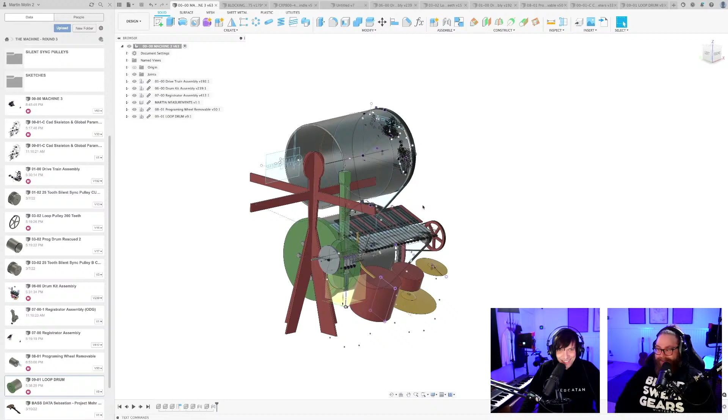Discussions in the previous stream, if we were going to use... We've been thinking about high-level stuff, so I'm going to try to take it up. If we can show the sketchpad, we've been in a rabbit hole today talking about using paper as programming memory for the Marble Machine 3. And there's been a very big discussion, or plastic, or Tyvek, someone said. This changes the identity of the machine completely.

And we've also been talking about, if we go back to CAD, how to insert the programming wheel. Let's see. How to make the programming wheel removable. Where are my... Once again, I have so many designs. And yeah, so it's been very high level stuff. Here is one removable solution. But where did the other go?

And I have just figured out a new solution for how to put these drums on and off using the hero of the thumbnail. Yes! Twist to lock pin that is saving our Friday night. And I want to CAD it, it's going to be pretty easy. I think to CAD it to show you how this will help us have only the circular tube.

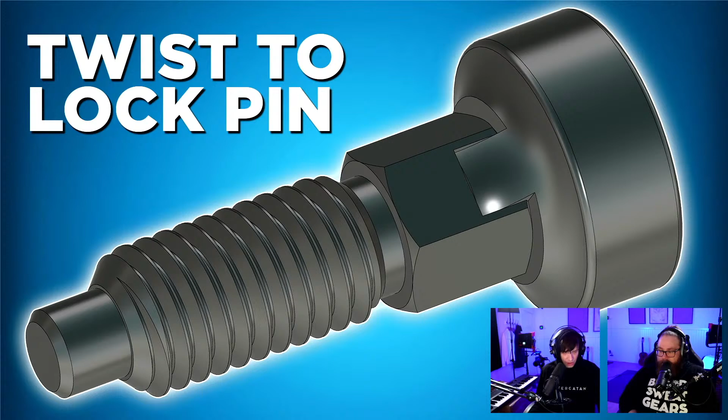Yes. We could machine very accurately these kinds of holes here. So if you think of it, which would make it very, very handy and very space efficient, to use this aggregate head to drill the holes in the sides for this twist to lock pin. And I actually have the twist to lock pin right here. And the cool thing is that you pull this thing out, you twist the head 90 degrees, and the pin stays in its retracted position.

Ooh. So one person could click, click, click, 8 pins on one side, click, click, click, 8 pins on the other side, and the programming wheel is ready. Put the drum in, and I figured out a cool way to make that easy. So I'm gonna CAD that now, and I think the drums are still saved. We're not gonna go to paper. And we also have this hammer jammer bass solution here from the previous stream.

And Hannes 3000, while we were just having some food, Hannes said you can also improvise on that hammer jammer. Like, yeah. When you start thinking about it with the original marble machine, for me at least, the first 2 minutes of that video is mind-blowing at first. Like, oh, this guy built this and it makes this beautiful music, and then all of a sudden the breakdown comes, and then you start with the bass. That's the magic. You get your mind blown twice in that video. First with the machine, and then your interaction with the bass.

So that's a crucial part of the marble machine in my head, you being able to play bass, and with this hammer jammer you can freestyle completely. You don't even need the marbles to be dropped on the hammer jammer doing the solos. You can just freestyle, slapping that bass however you want. Yeah. Woo-hoo! Made me really happy. Just mute the bass channels, no marbles get dropped, and you...

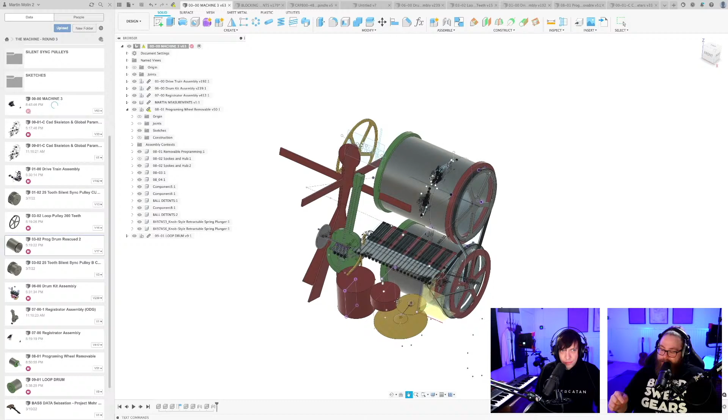Here we go. Immediately in chat, B-Boot Champ: Hannes is 1000% right. That's what we like to hear. Woohoo!

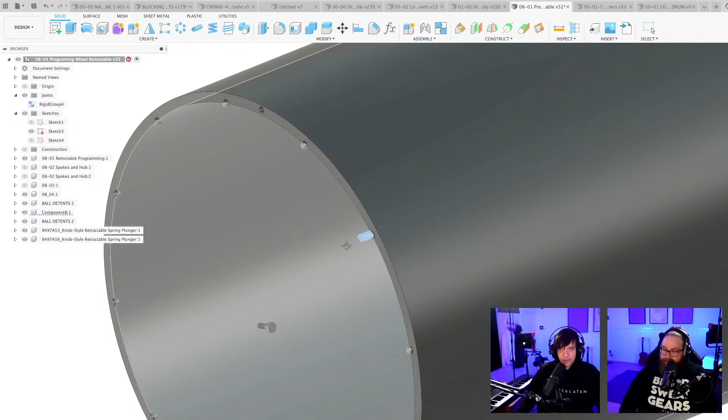And PK Margo, Hannes did not read me. I'm sorry, I can't always read everything, but let's see what you wrote. PK Margo: Martin, many music boxes can store up to 6 different tunes in a single cylinder. Have you considered this instead of, or in addition to a removable drum, you could change program while playing? So the way that is working is that the pins are programmed in a spiral. Then you can have a 5 revolution long song in a spiral, or you can just shift the drum over and you get a new song.

I have thought about it, but I just think it's too difficult or not practical because basically the registrators would be so thin and the pins would be so thin. So the idea now is just like on the Marble Machine X to have a spare set of rolls that someone can program off the machine while playing song 1, and then we switch them back. I think that's gonna be awesome.

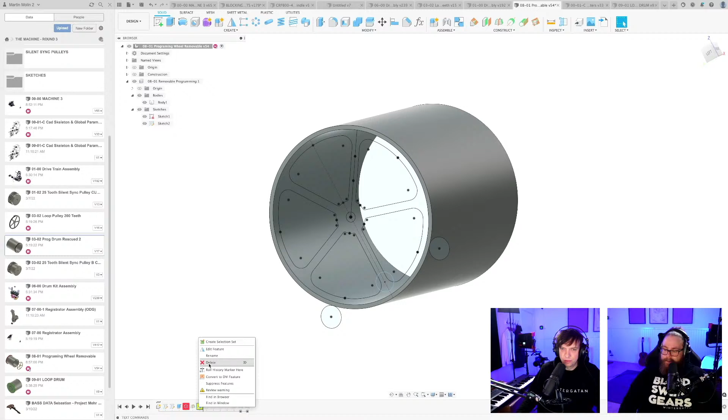So let me see what this is. Check what this sketch is. Nothing. So let's see. We have Joey D, who said a couple of days ago, and he will say it again, look for a ball lock clevis pin. It will solve a lot of problems. I can Google that for us, see what that is. Interesting.

Let's see what we have here. This is a ball lock Clevis pin. They are beautiful. What makes these so great that will solve a lot of problems for us? Could you specify that, Joey?

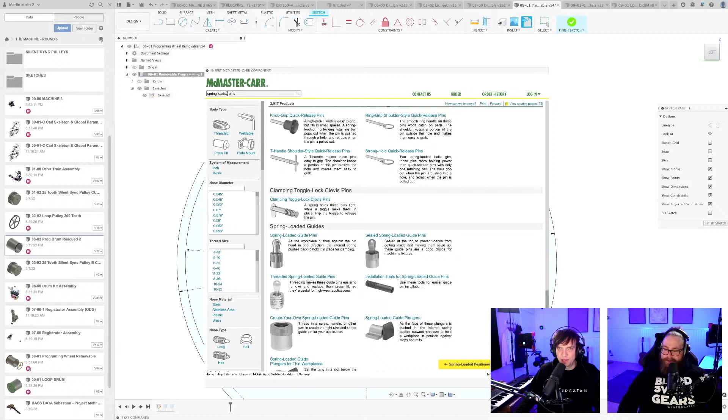Another thing that someone sent that we have actually in the programming pins -- talking about programming pins, you should pull that up. There's a suggestion, Hannes, in Programming Wheel to use, instead of the O-ring idea, just use these slotted spring pins. So was that an old suggestion? No, it's in the new one.

So let's say if we have them in metric. Yeah, 4mm is the smallest one. How long is this? 4mm length, what? No, 1mm diameter. Oh, and here's -- oh wow, we have them in every size. Here's 3mm diameter. Let's try 20.

So I think what you're suggesting with the ball pin is the same thing, that we can just find a pin that has a press fit designed into it from the beginning. So here's the pin -- just want to hide this body. So it's like a pin with a little groove, so when you put it into a hole you can push it in with some force, and then you can take it out, and it has press fit built into itself. This, I think, makes a lot of sense, and I think this is actually a better idea than the ball detent. Did you have the suggestion for the spring pin?

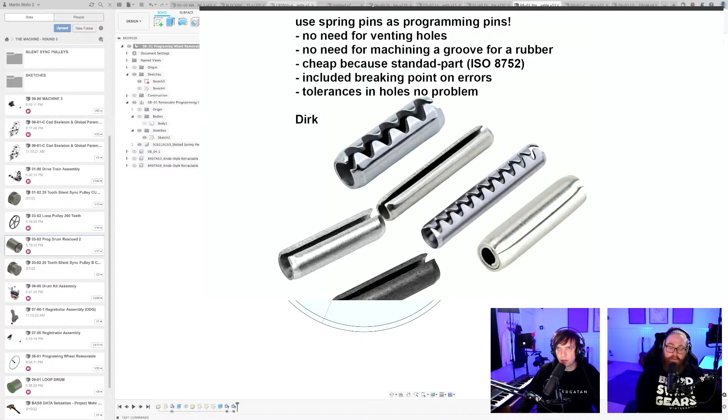I have a couple, can we just scroll them through? Yeah, in that folder? Yeah, let's take a quick look. Take the next one, I just want to show -- take the next one, I'm gonna look at this later. Yeah, next one, here. So Dirk says use spring pins as programming pins: no need for venting holes, no need for machining a groove for rubber, cheap because standard part, includes breaking point on errors -- maybe, maybe not -- tolerances in holes, no problems. I can't think of a simpler idea than to use a rotary CNC machine and just drill holes and insert spring pins. I think this is a winning combination, Hannes 3000.

Woohoo! Yeah, so I don't actually want to derail this stream with too much programming pins discussion, but I think the spring pins is a very, very good path forward, because I want to show you how I think we can replace these drums in a very safe and repeatable way.

Let's delete this, just deleting everything that I had in this design. Oh, that's the hole, let's delete that. Let's delete this. Let's delete this. I think I could have started from scratch, but hey.

Some people have some experience with spring pins, saying they can be really hard to get out, and even in. Yeah, needs a punch and hammer to remove. Okay, so that doesn't sound good. We need something lighter than that.

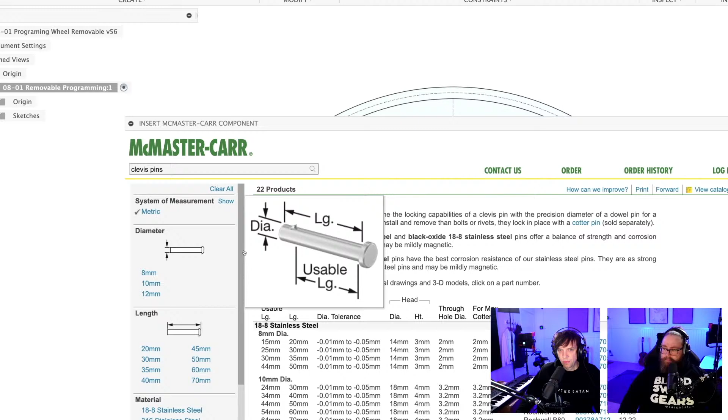I wanted this first as well, but we can't use 8mm pins. That's why I still think the O-ring is a good option. But anyway, the direction to use something like this is good.

One of these - if the spring pin is not flexible, then I agree. Either it will not grip, or it will be too tight.

So here I'm going to cut these resting pins that I talked about. Let's do 45, so it's lying safe.

And for this one, I'm going to do a parameter on the fly, which I learned yesterday from a super nice comment on the stream. I checked it up after the stream. Anywhere in Fusion, you can just create a parameter on the fly, they call it. So I say...

Pin size equals, sorry, I lost the zoom. I say 6. So there's 6, and it doesn't look like a function, but it is. Because if I go over here to the other hole and I say I want to constrain you, I just write P, and there's the pin size. Oh wow, and it becomes 6. Nice, so now I have a parameter on the fly. It's a little cool trick, actually. On the fly, everybody. Woo!

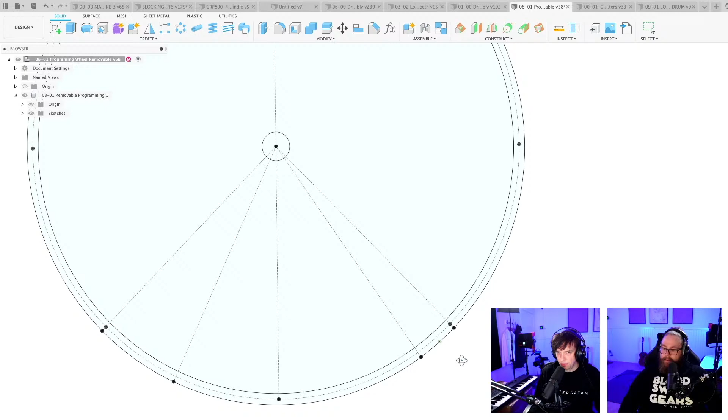Jerome Blomshire says just use Lego spring pins and go full circle.

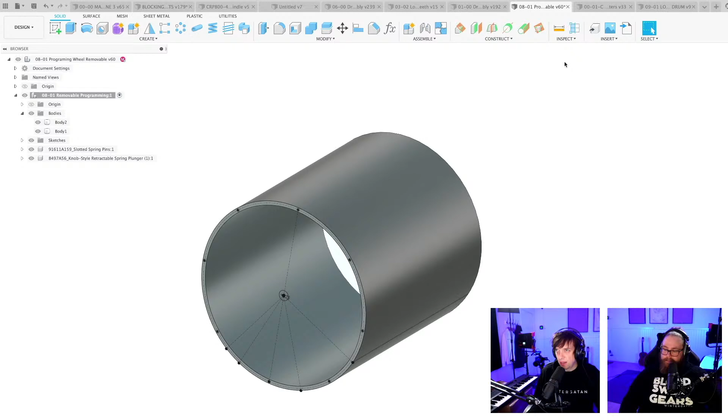You are a Gretzky, skating where the puck is going, because I think the X travel is difficult. So the question is about how this CNC machine will be able to reach - is it called Z height? Yeah, Z. Is that the same thing? Yeah, so Z probably, which is Z.

Alex CNC have made these precision plate designs, which means we can lower the whole gantry. The whole axis can be lowered so that this thing is touching the floor, and on the CAD it's in the highest position. So the Z height is going to be enough when we lower it to the lowest position.

I could kind of illustrate it by making a sketch here. This really wants to be on this side. So if I make a 110 circle here, which is larger than the thing we're gonna cut, it can be down here. And as you can see, it's kind of hard to get to that.

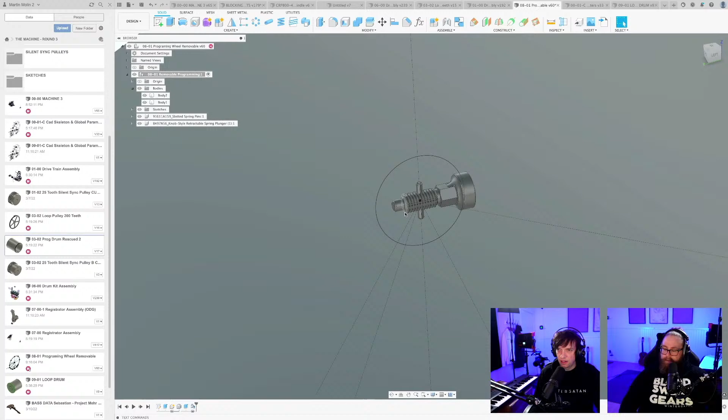Let's go back to the programming wheel. So here we can see how far this pin is protruding from the surface. I'm going to drill a hole just a little bit over that. From here to here is...

Measured strange. From this plane to this plane, 5 millimeters. But depending on drill and stuff, I think we should go a little bit deeper, so let's go 8.

And I'm just gonna take them all. I should perhaps not do that. I should perhaps just do a circular pattern on the feature.

KK Altair just entered the live stream, and Martin is looking at saws. That can't bode well.

I'm taking this cut feature and rotating it around this axis 8 times. Boom. And then I'm going to do the same on the other side, which I'm going to do over a mirror plane - mid plane, I mean.

Just want to say this here real quick from B Bootchamp: McMaster Carr has a half groove dowel pin, pre-grooved for O-rings. It comes in 3.175 millimeter and 2.38 millimeter diameter. Can you give me the name again? Half groove dowel pin.

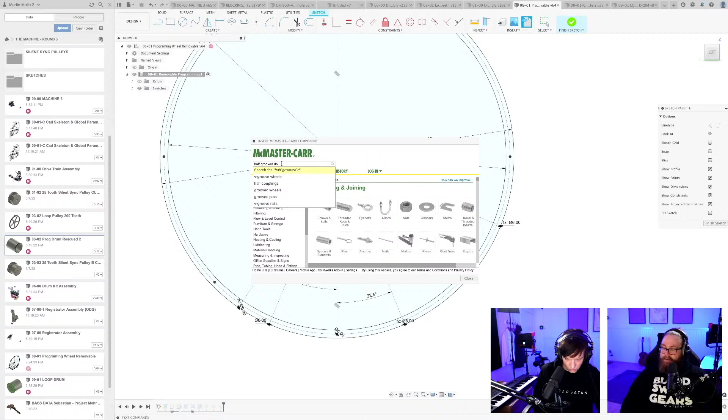Okay, follow up here from B Bootchamp. No, not those ones. It was on the screen. Half grooved dowel pin with notch. Half grooved dowel pin. Okay, let's just go for dowel pin. Half grooved with notch. Half grooved. Oh! Here we go. Gretzky in the chat. Oh, wow. It's even for a spring like that. That's cool.

Inches. Only in inches for me, but I can probably... What is 332? Let me download this one. Where did you go? Sometimes it's here somewhere. Oh, it's there. It's very, very short. Just had B Bootchamp screaming out yes in chat. What is this? What's this strange shape on the side of it? Typical when you find the thing you want and they make something you don't want. Ooh, this is 2.383 millimeters.

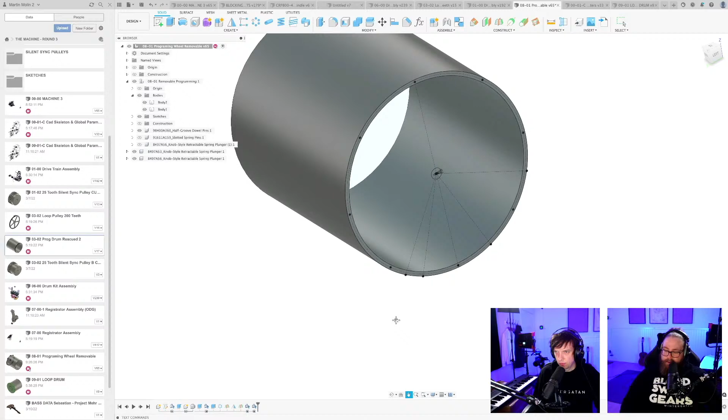And Joey D has concerns about O-rings. He thinks O-rings will make the timing off because of tolerances. The idea is that the pin is straight from the precision fit of the hole. I hate when Fusion makes these lines. Anyway, so the idea is that it should not do that.

So here is my kicker idea. So in the surface, we can machine this. I'm going to make 6 millimeter, maybe 10, cutouts like this. And that means that when all the slots are opened, we can just lay the programming wheel to rest on these pins that sit in the gear. And by cutting another configuration on the other side, we can fix that.

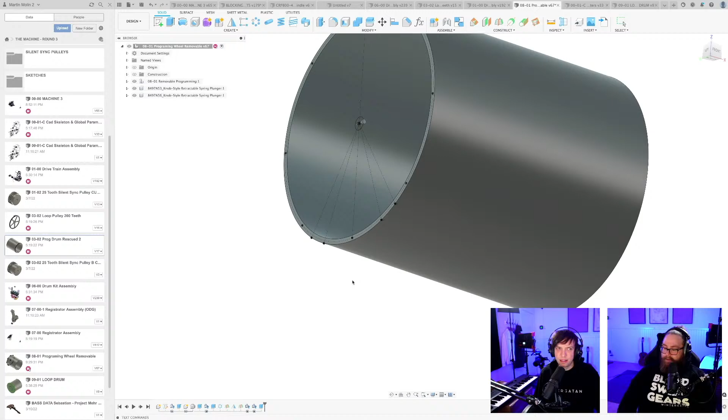Lucas Wendel: I wouldn't worry too much about the pins. Any CNC shop with a bar-fed lathe can groove and part off ground stock; shouldn't be too expensive per pin. That was what Alex CNC said also. A CNC lathe will spit out these things, he said.

Now there's something wrong here with this cut feature. I have no clue. So I'm trying to cut. You see, it doesn't look right here. Oh. Someone messed up. Probably Fusion, right? I would say that's absolutely the most likely. Oh, I should cut the whole circle, of course, because Fusion doesn't like when planes are exactly next to each other. So I'm cutting the whole circle, and this should be the end of all our troubles.

And Martin, if you would be so kind, could you just explain a little bit what you're actually doing right now? So we are talking about how to make the big programmable drum removable from the machine. In the previous stream, we even talked about using paper programming, which would not need these drums at all. We were discussing wildly the whole day about that. Right now, the drums are still in. And then we made this solution for removing them.

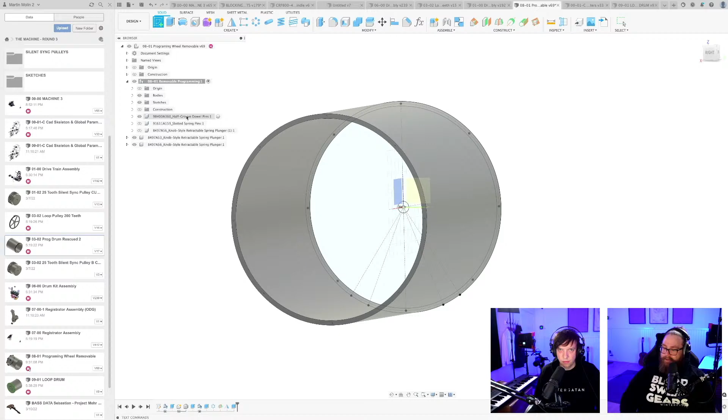So let's now make the other side. I'm going to sketch the other side. And I'm projecting this sketch on the body, which is not really professional. I'm doing it anyway. And my idea here, the thing that I wanted to talk about, is that I want another configuration on this side. So let's project these lines as well.

God, I'm slow when I'm talking. Come on. I wanna learn to be fast in these streams. I think that these streams are helping the project immensely, but I want everyone to feel like, whoa, things are happening. I want to be fast. Yeah, but if you're too fast, no one can follow along what you're doing. We're trying to find a middle road there. Some people actually learn stuff from you when you're working like this, Martin. Don't forget that. That is true. Thank you, Hannes.

So I'm cutting almost the same holes, but here is the new hole. I'm cutting on this side, so there's one hole off. And what did we say? 8. Which means that this drum can only rest on these pins in one direction. And 10 we did. And what I'm doing here is just so when all the lock pins are open, the drum will be able to rest by itself.

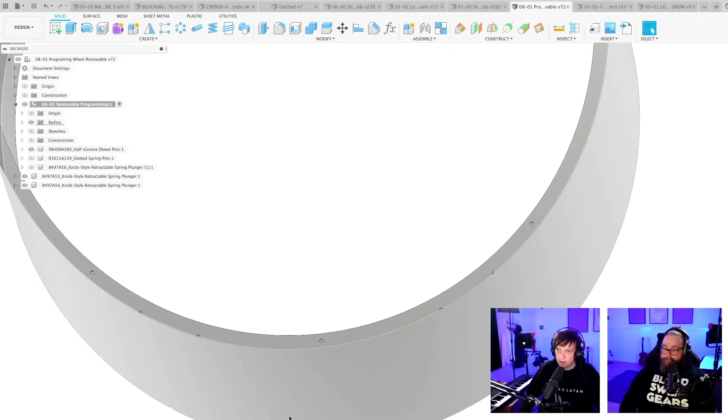So these indexing pins should take care of that. But you are right. We could make it even more secure, if we see that a pin is not going in. No, basically no pins will go in if they put the drum in the wrong position, because one pin here will prevent everything from going in. So this is exactly my idea. Okay. So brilliant viewers. Yes, Gretzky's in the chat. Skating where the puck is going.

So let's now take this, our friend. I almost called this video the best pin in the world. Some engineering clickbait, high level engineering clickbait. But instead I went with the totally non-clickbait: This pin just saved our Friday. Look at that pin. Isn't that a little exciting?

There we go. And I'm going to just copy this. So we have 8 of those there. I'm going to mirror all those over to the other side just for fun. We're having fun here. It's your own world. You can put a pin wherever you want to. A happy little pin. Right?

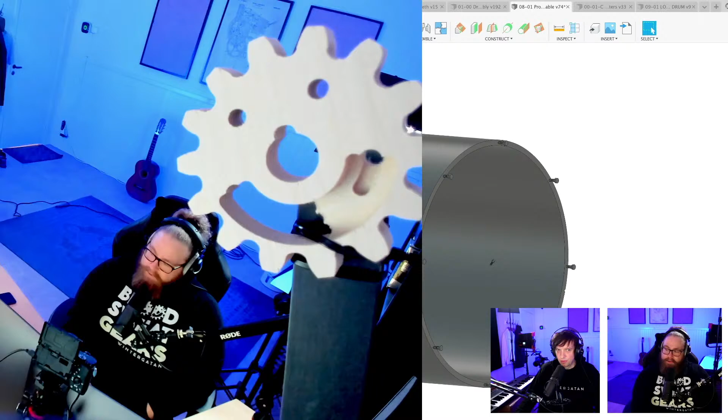Do you know who's against it though? That guy up there in the corner that's watching ominously over our shoulders. Yeah, keeping us in line, of course. Never happy, is he?

So there's the pins, and the magic of these pins is of course that you can retract them with your hand, turn them 90 degrees and lock them in their open position. So let me now CAD these resting pins that I'm talking about. Yeah, then I can show this. That's good. So new component, resting pins. And these will not be retractable. They will just sit in the gears and the hubs.

So there will be a resting pin here, one here.

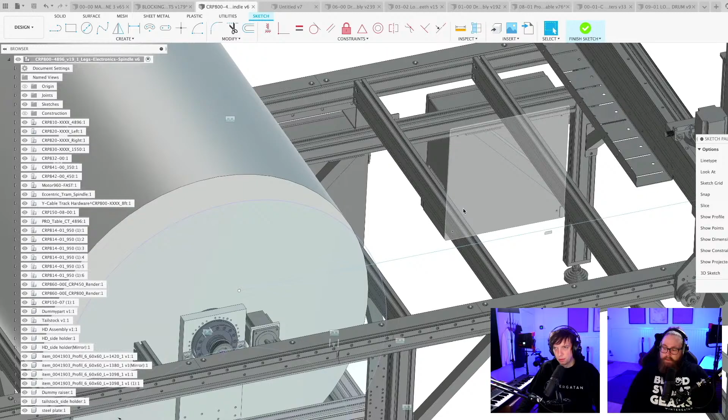Boom. Let's now make the resting pins on the other side.

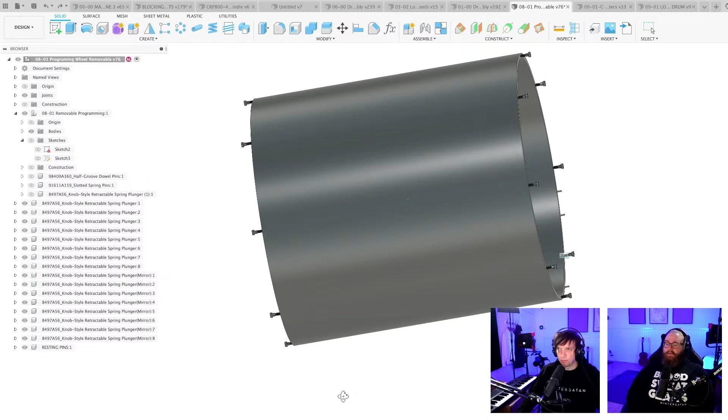And what is kind of amazing is that we can put the first programming track already after like 1 centimeter here. So these stick in, what did I say, 5 millimeter. So I should actually have maybe even less protruding here, so we can start the first programming track even earlier. But maybe that's a little greedy.

So these pins sit in the hubs, so let's make the hub. And this is where my feeling... I don't know how we can make the hubs really straight, because there's nothing actually locking. We need a strong hub. Not just a bearing on a little shaft. We need something better than that, perhaps. How could we do that? So, right hub. The left hub is going to be the gear.

B-Boot Champ is on fire today. Have we completely ruled out the possibility that Martin can tape all the instruments to Hannes 3000 and he just throws marbles at him to play the music? Hannes has a body now. Use it! That was never really an option. So, boom. Shakalaka.

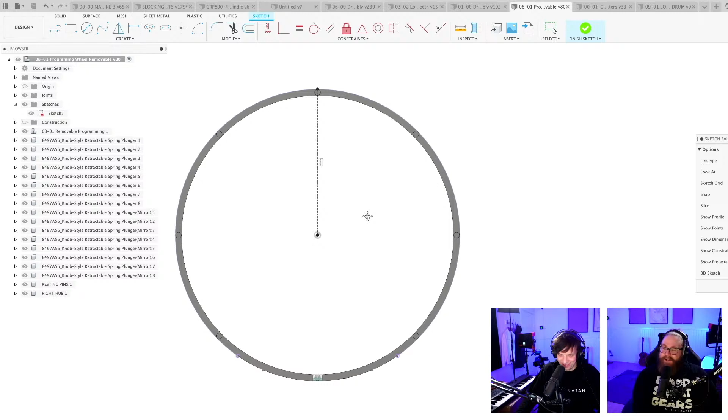I'm a big believer in our future because of globalization. In the end, we're gonna understand that we live on this pale blue dot in space. I think we can become friends, all of us. Right, Wilson? If you ask this guy, he would just say, "Not a chance in the world." But I believe it, Martin. Good. I've seen it in chat. People have an idea that they're really fighting hard for, and then they get some evidence from you or another one in the chat, and they're like, "Okay, I hear you. I understand."

That's like a famous science story. There was a super famous professor, astrophysics or something like that, who'd been working with this theory his whole life, and there came this new young scientist who had done some experiments and came to the university and made a lecture, and the evidence invalidated most of the professor's life's work. After the lecture, everyone turned to see how this famous professor would react. And he slowly walked up to the stage, shook his hand and said, "Thank you for proving me wrong." And everyone erupted in a big applause. That's goosebumps right there. It's the scientific method. I love it. I believe in it.

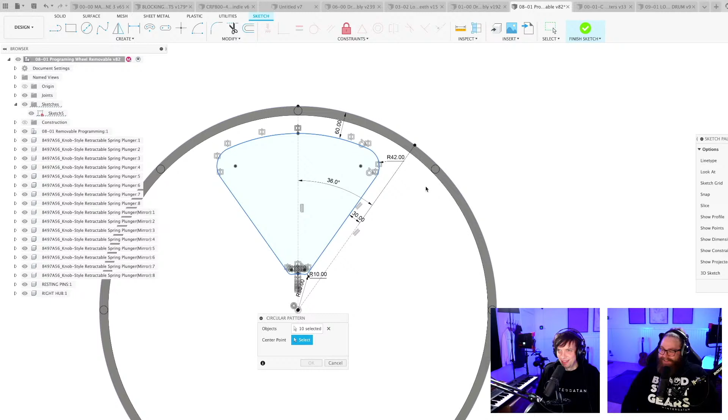We have a weight calculator in the public link pasting document. You can actually calculate the weight later. So circular pattern on this, and we will have our spokes. AKA Marco69: "Spokes are so easy to CAD these days." That tells me you have seen me do this a lot of times now.

So let's do this for a hub. I am a little bit worried about something. What will actually keep this hub really solid? Is my whole pin thing a lie? Have I been lying to you this whole stream? I want to project the pinholes from this sketch. Is it here, the sketch? Yeah, I'm finding a weakness in my own thesis, and I'm not as happy as that lovely professor we just talked about. There's one thing when someone else comes and proves you wrong, but when you prove yourself wrong, less fun, right?

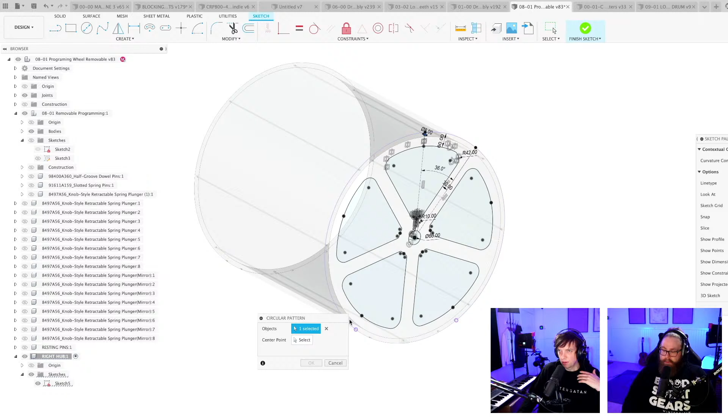Yeah, so there's nothing really keeping this hub tight. Look, like pushing the hub to the side. It's just a pin, so oh my god, my wonderful solution. Maybe it's not so good, Hannes. What am I hearing? This is not what I want to hear. No, me neither. Me neither. What? Okay, here we go. Now I recognize myself.

You know what, Martin? I'm gonna head out and prepare some thinking juice. Yes. Friday thinking juice. Yeah. Be right back. To make this design work.

So this is why I love this design. I think this was so cool if you think of these pins, that you can open all the pins and just take this out. But we need to make this sideways stable somehow. We can of course press it towards each other. So if it's a little bit hard to get this in, that you really have to press it, they will press outwards. That will be enough, I think. But it would really require it to be a little bit of a press. But I'm not against that.

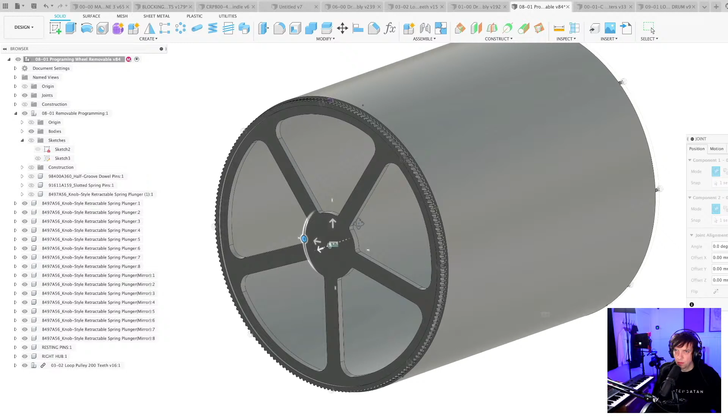Let me just think, because what I'm worried about now is that we do not have a shaft through this whole thing, because we want to be able to take this out. So I'm worried about the sideways stability of this yellow thing. That's what I'm thinking about.

Oh, thank you. Friday stream. Cozy.

Let me bring this hub over here as well. Boom. It's this sideways efficiency that made me love this idea so much. But what I realize now is, how can we really... If we just push it to the side really thoroughly, so the drum is press fitted into place, it has nowhere to go, and it will work.

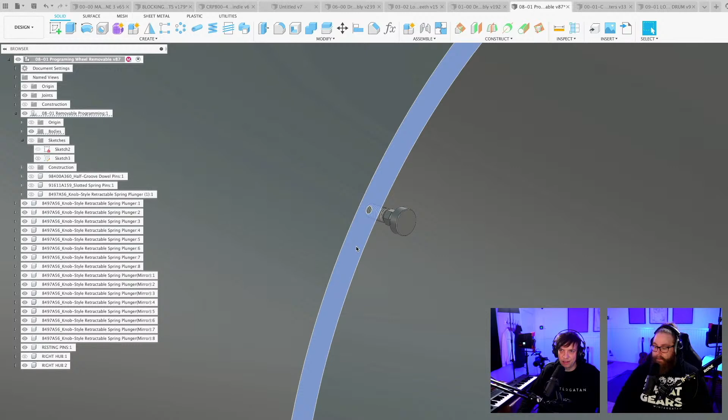I think as long as... Let me make the shaft. I think maybe... Oh, we can use the flanged bearings. A large flanged bearing here. And then if it's just a press fit... Am I being stupid here? I don't think so.

I'm fighting for sideways efficiency. Maybe a little bit too much.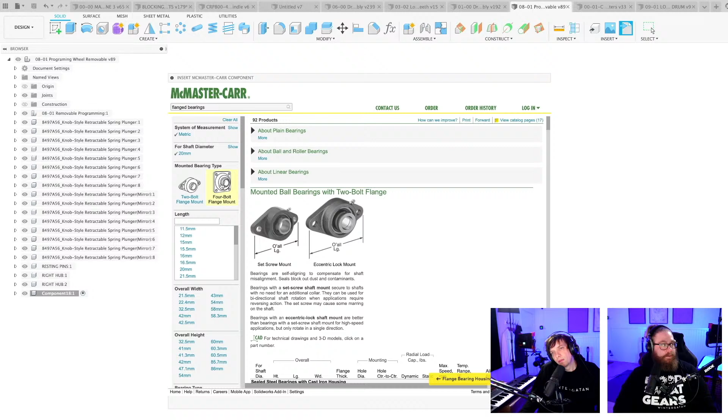Flange thickness. Oh, these are... What? $175? No. I'm going to search for bearings instead. Ball bearings. Ah, here, flange. These are the ones I'm looking for. Metric. 20 millimeter. These are beautiful. Housing, let's go 32. Oh, only 7 millimeter. They are so smart, these. Let's see how thick the wide one is. 9 millimeter sounds a little bit better. Download.

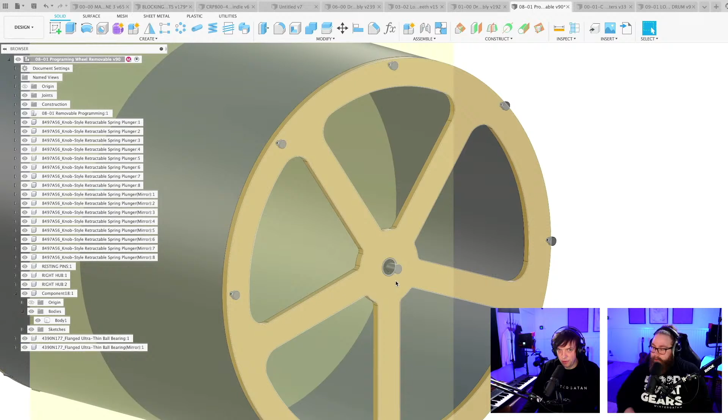Let's mirror this bearing over to the other side, over our midplane. There we go. Look, we have our first bearing on our shaft. But the idea here is that nothing can actually stick out. So this shaft cannot stick out like this, because then we can't get the drum out. So it has to be in there. Can we fit a small little something? And then we take the drum off. This whole thing can fall apart. We can fit a little stop ring here. Yeah. I think this could work. But it needs some tweaking.

Chat is saying that there are a couple good suggestions in the Dropbox right now. Should we take a look at some? I would love to. I'm in the programming wheel. Yeah, before we go there, let me just import this. That's important. Let me import it into the main model, just to feel that things are happening.

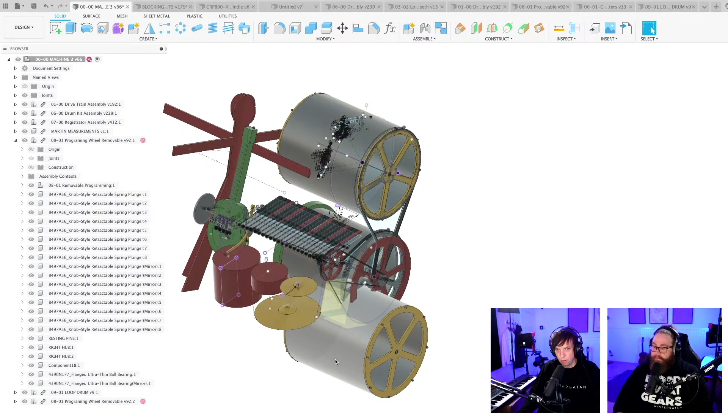So later this spoke is going to be the same as this. And I did the same mistake. We have to do a rigid group. You can see that everything did not follow. Nothing basically worked. So what you have to do then is make a rigid group. Woo! Let's make a rigid group of this whole thing. And then when we update, it should pop into place. Something went wrong. Wait, do we have... Oh, it was already imported. I'm stupid. Because I redid the previous. Okay, good, good, good.

I like the simplicity of this. So let's check the suggestions. Let's see what we have in this folder at the moment.

Oh, first off, seems to be with the paper in mind. Paper or plastic spike wheel, paper lies on top of prog wheel. If no hole in paper, spike wheel cannot engage with prog wheel. If paper has a hole, spike enters prog wheel hole and prog wheel drives spike wheel, which drives instrument. High torque with paper, prog wheel can be any size.

So this is a way to make the paper stronger, so the paper hole goes over. This is a very interesting idea actually, well done, from Isaac Robbins. Nice, Isaac, I think the idea is to make the paper reliable, so you get the strength from the programming wheel. Although you have the problem that you have to manufacture both here. But this I've never seen, it's a very cool idea. It's a really small image.

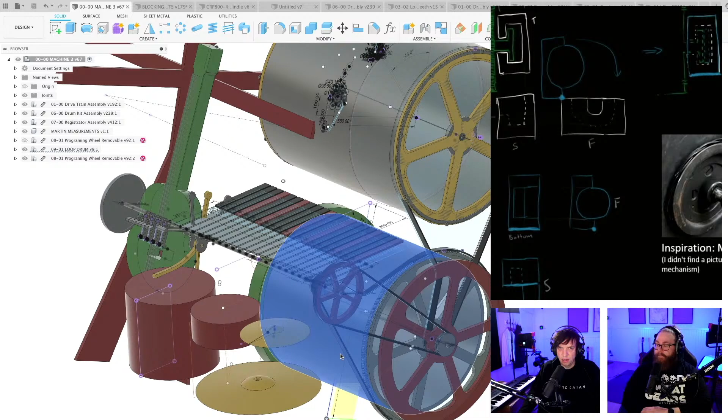Because the lower drum, this drum, is 800 millimeter and can fit in the bigger drum during transportation. So we have 4 of this in total, so we had 2 pairs.

Let's check the next one. Paper roll with loops - well, I can't read. Stabilizing table, yes. Oh, you dropped the marbles through the holes. Cool.

That is going to be tricky in different tempos, though. Oh, this is so fascinating to see things I never thought of. So thanks, Lucas, that was awesome.

Programming drum, axle supported in bearing block that can be split or released, axles some other way. Belt pulley space needed more between frame to be able to fit the belt pulley.

Oh, so that's the sideways sketch, from Lucas Vandel. Aha, nice, copying from music boxes. Space needed more between frame to be able to remove drum. Axle supported in bearing block that can be split or release the axle some other way.

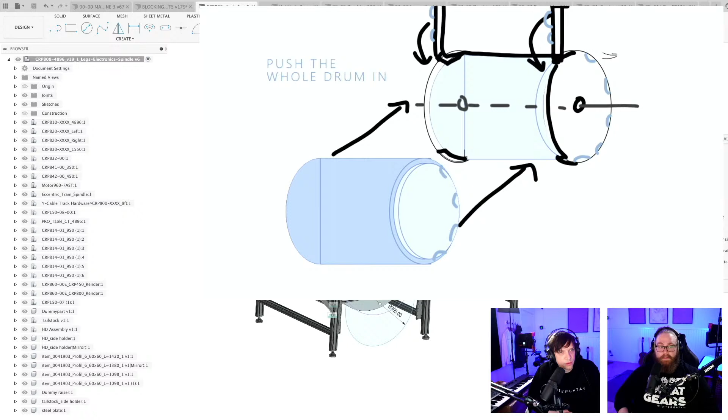Push the whole drum in. Yes, that's what I want to do. Oh wow, that was small text everywhere. Oh, there's more papers here. Yeah, dropping through papers - equals, oh, it's the same idea from 2 people. I love when that happens. This is also Lucas, I think Lucas, who sent the earlier one.

Oh, so this should be in the link. Oh, can we see the whole image? Yes. If this is working, no programming wheel change is needed, just discs from the side. Programming wheel.

Disc pushed from the side. It looks cool, but I don't quite follow it. Drum can be unlocked. Opens, closes here. Open.

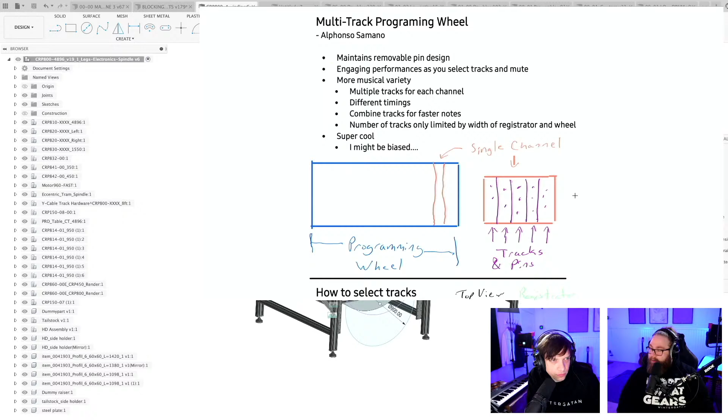Go down. So, how pin springs, track selection. Let's see further down. Yeah, so this is the music box idea.

If we could just shift the registrators over, let's entertain this suggestion. Let's go to the sketchpad.

Let's say we have the registrators here, and let's say we have a black pen, and let's say we had the space for it. And let's say these were all connected on some kind of rail. Wow, it created a straight line for me.

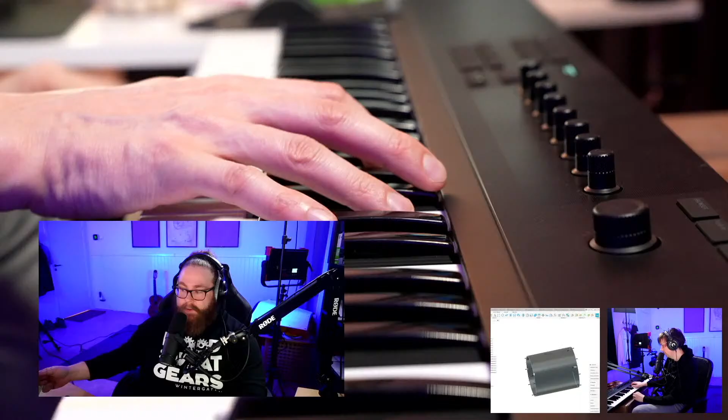And you know, because we don't have the magnets anymore, let's check how much space theoretically we could have on our programming drum. Let's say we make it, because it's only the readers we need to switch over actually. This might work. I've been so annoyed because I wanted to make long music, and the paper - we talked about this a lot earlier today - the paper would allow us to make things like fermatas. A little pause here.

And then we could just, with the paper, change the key and stuff like that. And me and Hannes have had fiery discussions today. No, we're going to go with the programming loop. And if we look back at the sketchpad again, we're not going to use paper. This idea to shift all the registrators over one time, or three times, two times, might work. Let's... probably not, but probably not.

Let's go to full screen CAD and see if we can figure this out. What do you think, Hannes? Yeah, it can be a really cool feature. You're skeptical? Let me see what you have in mind. I haven't seen this before.

No, this is how they do it on... oh, we have a video with Luke. Go to Luke, the video we made with Lucas on YouTube on the main channel, because he's shifting the drum over to choose the song. I think we made that into the video - the barrel organ that sounds awful. I think Lucas agrees with that. It doesn't sound awful, it sounds awesome. I think that has a nail drum, and I think Lucas is shifting it over sideways in the video. Lucas can confirm.

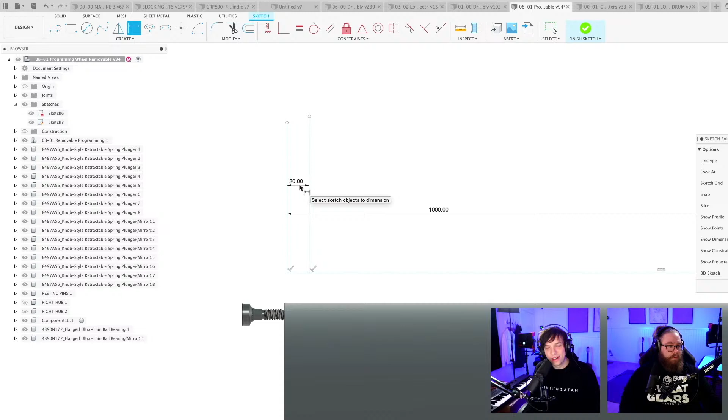Wait, this might work. This might work. This might be a beautiful new era. Imagine having not 64 bars, but 128.

Because there's still 10 millimeters. This depends on how much space we need sideways for each track. So with a 3 millimeter pin, oh, it's gonna be busy.

So I'm gonna drill the first programming hole here, 3 millimeters. Oh, look at this. There's a lot of space because our pins are so small. This is not an issue. We can do this. And even if we want 16th and things that are really close, we can just put them here.

So I'm now looking at the programming hole pattern, all possible holes. So if we then go to our registrator that we worked on the other day, here, our beautiful Registrator that I love so much. The only thing we would need to do, first of all, the linkage would need to be able to accept a 1 centimeter sideways shift. Imagine the big lever that just moves all these 50 registrators over a centimeter, shunk. And we have like a new, ooh, if there's a programming pin in the middle when that happens.

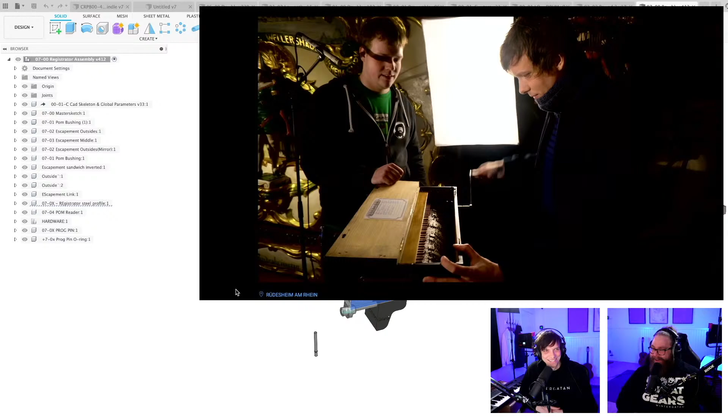Show the banjo, Hannes. We have to see the banjo. We filmed an instrument. Is it directly in the... No, it's not. Here's the banjo, right? Let's see. Banjo orchestra. This is brilliant. Plucked mechanically. Yes. Look there. Ooh, I love it.

Martin, you ruin it. Oh, short-haired Hannes. Nice. And this is an accordion I think I would be able to play perfectly. Hook fast. Good joke, Martin. Good joke. Brilliant 10 guy, out of 10. Brilliant guy. Stand-up comedian. 10 out of 10.

Okay, so Lucas pointed out there, sideways shift when the programming pins are in means trouble.

Divide by 51, not 50. Someone said they remind Martin. Oh yeah, you're absolutely right about that. Because we want some space on the outside. Gretzky's in the chat, skating where the puck is going.

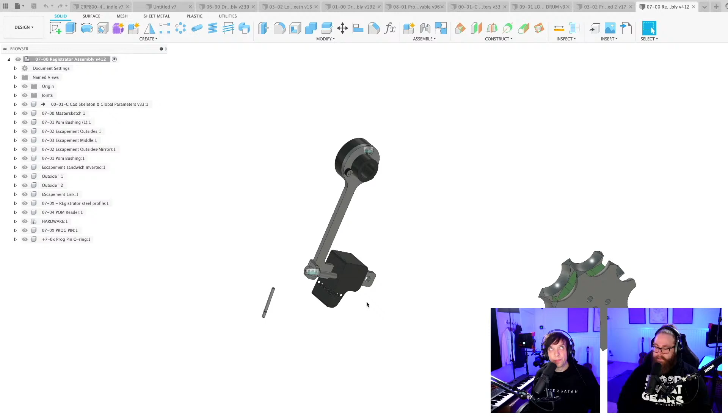And also someone said video evidence, move the barrel, not the registrators. Just because it's on video, it's not automatically evidence that it's true. I have seen videos of things that were not good. So I'm just logically trying to get the statement together. I understand what you mean.

I think it's much easier to slide these on a shaft than to slide the whole drum. Of course, the mechanical links after these, they only need to be slid 1 centimeter. Slide the whole drum. But how do we deal with the sideways things? Maybe if there's enough flex somehow, maybe we can get around it.

So my point down here is that this poor little 3mm programming pin, it doesn't need this monster of a registrator to hit it. This is 25mm wide. So if we go to the sketch of this one, where is that one?

This is too cool. When I saw it, what's the name of the person who made the sketch? Alfonso Samano. Yeah, when I searched first Alfonso, I was like, oh, that's cool. I wish it was like remotely even possible. And right here, right now, I think it's absolutely doable.

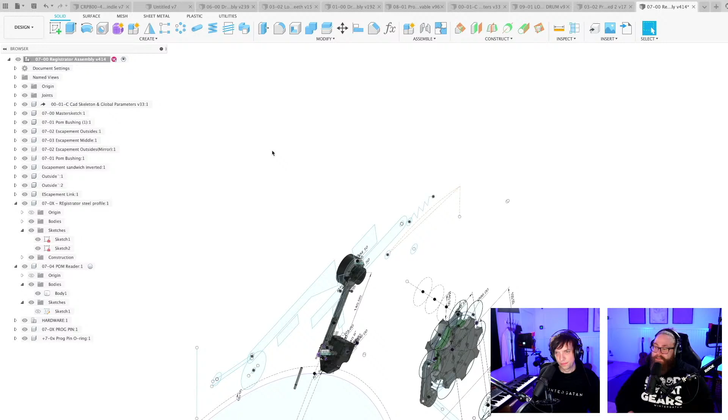This is interesting AF, Hannes 3000. Yeah. And we have a lot of suggestions to go through still. Because when we started looking at suggestions, new ones popped up on Dropbox fast. Hold the thought.

I'm thinking about the edge case that you want to slide either the wheel, or I think this works. You don't understand what kind of possibilities are opening up. We don't have to have the same melody over and over again. That repeats over and over again. That's why we love it as well. But we could like go to that thing and then back to if we wanted to. Verse and chorus, just like Alfonso showed it.

So the edge case, how do we solve the edge case? When we slide something sideways and there's a programming pin right to the side of it, something needs to flex. And that's something... Cookie crumbs. Have the verse and chorus pins always triggering. Have a muting group for each. Now you just doubled everything on the whole machine because you doubled the amount of registrators, you doubled the amount of...

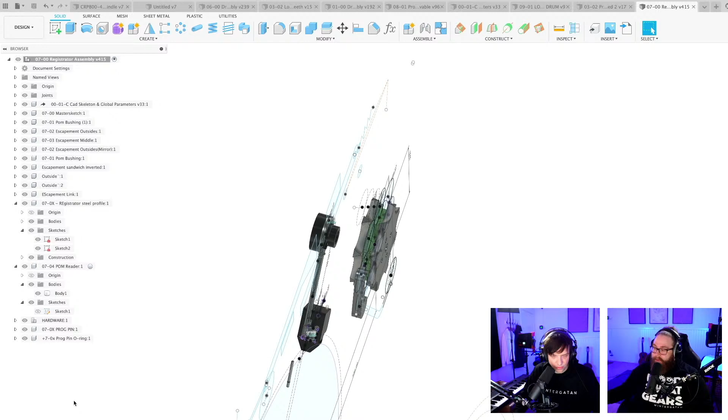It's an extremely interesting suggestion. I'm gonna write it down and let's look at Alfonso's and give him credit. Sheet here. 2 tracks, prog wheel, chorus / verse. Wow, I love it. Alfonso Samano. How to fix edge case. I don't even think that's exactly what you mean, but maybe you meant a little bit like that. Some of it is definitely it. How to fix edge case when sliding over prog pins.

Yeah. We don't want half hits and stuff. Yeah, this is not... Of course, you can end the first song with a big break. So all the music will have breaks into the new... So if you have like... pause, switch. Pause, switch. Maybe like that. Yahoo! Now I've made 3 parts though.

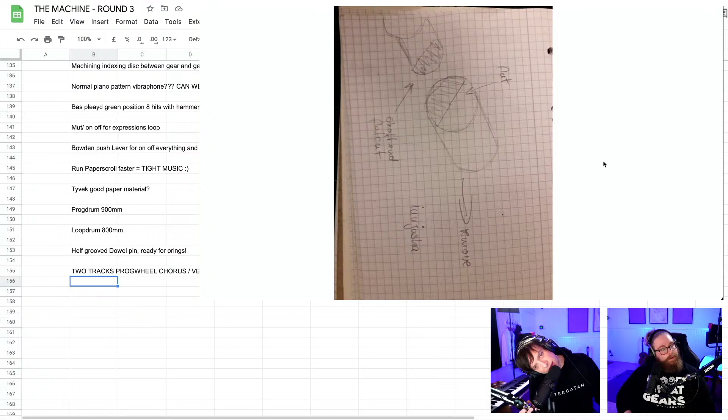Let's check next suggestion. What does it say? Shortened? Cheers. Need some thinking oil. Thinking juice. Not shortened, flat cut. It's on the side. Yeah. Can you not rotate it? Well, can I? Let's see. There is a button for that there. Perhaps I can. Flat. Shaft and flat cut. Remove. Is it a programming wheel? Yeah, so I'm missing the context. I'm a little slow.

Paper curves, paper wraps around, registering pins, relief channels, stiff ends tuck in. So this person is a little bit into the same thing that we saw before, that the programming wheel is supporting a paper. No, it's just to drive the paper in the correct... Yes, I'm with you on this. Stiff end tucks in. Okay, now I'm with you. It's how to drive it in a good tempo. So if we look back on our previous thing, I think what we're seeing in the sketch is these holes that we also had here. So I'm with you on that idea. At the moment, the paper is out of the discussion. Let's check the next one.

Vertical toggle clamp. Ooh, that is kind of sweet. Protrudes kind of a lot, so it will make the frame wide. Okay, cool. Cool idea. Pinholes. This is what we've been working on this stream. Permanently attached to the drum. Okay, so we make some kind of little rim permanently attached to the drum. Drive wheel stays in machine. Yeah, I really like this. This is very feasible.

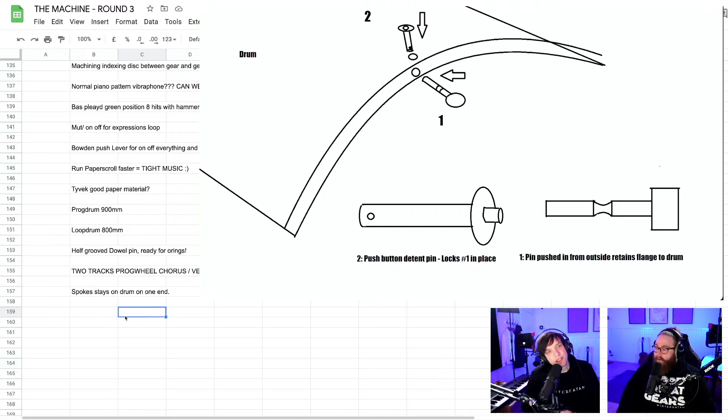Yeah, so this would work, but it steals programming surface. Because you see you have metal and a hole on the top, and we're only using like 6mm of the side. And if we go back to the Hirth locking, actually, hang on a minute, this idea, that would use nothing. That would not even use 6mm like my pins.

Hirth toothing. I always love when I learn a new word. Toothing. Sideways. Efficient. But how to add axial force? When I designed the captain's ship crank, that was to make the axial force. Is it gone? This one. The idea there was some kind of spring.

I kind of love the idea that we can just use the CNC machine and cut like some kind of pattern on this in the side everywhere. So it just slots into place to the other thing. It's very elegant. No holes, no pins, nothing. That's elegant. This is a simple problem actually. We have too many good solutions. Okay, next one.

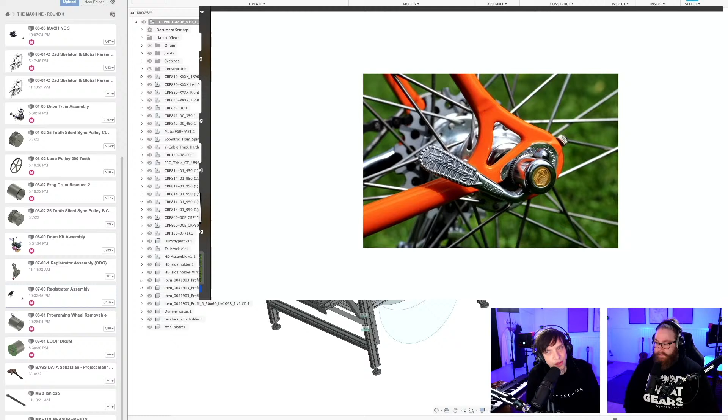Okay. Yeah, that's the... Like a bike? Yeah. I like this actually. Maybe we should just get a bigger touring, sell more tickets to the shows, bigger touring truck. We can have the spokes on, we can leave the hubs on the programming wheel. Yeah, this is super, super popular idea. Same idea here. You can have instruments in the drum because you have no spokes and stuff. We have something more.

Fastener, swappable programming wheel. Frame rigid. Okay, so the programming wheel has a hub in it permanently, if I understand correctly. The orange thing. Oh, okay. Or am I seeing it wrong? Yeah, so there's a lot of bike and of course they have to replace their tires. So it's a good inspiration. Okay, cool. And we have something more behind there as well.

For changing the programming wheel, just unlock the 4 pins, take it out and insert a new one. Spring tension, programming wheel. Yeah, I think this is similar to the idea I CAD'd. But the pins are sitting a little bit further down on the spokes. Okay, so let's see. We have a couple more. Yeah, I just want to say, can I show CAD?

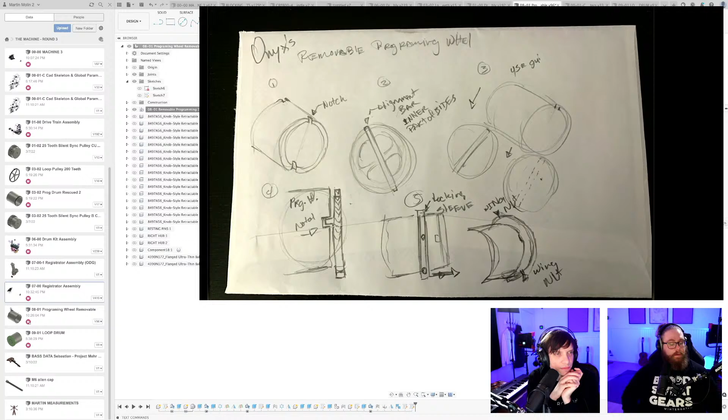Notch. Yeah, this is also good. Just slide it in the notch. How do you lock it then? Wing nut. Okay. It's so much fun seeing all your sketches. Now this is a very similar idea. So this is good for one side. This looks brilliant for one side.

Apart from the fact that we don't trust the inner dimension that well, but we can make features so that we can trust it. But how do we do on the other side? This one we saw. Collar fix. One side permanently affixed to side.

Oh yeah, so you slide it on, yeah. So are there bearings in that thing? I don't understand. If it rolls on that thing. Someone said this was inspiration from a car engine the other day, something that looked like this. Easy lift out. Ah, smart. It's a trolley made for the wheel, right? Made lock wheel. Gravity holds it. What does it say? Holds it down. Oh, sorry. Holds it down. Okay, cool. I thought the idea was making the trolley that just comes in and takes the wheel perfectly.

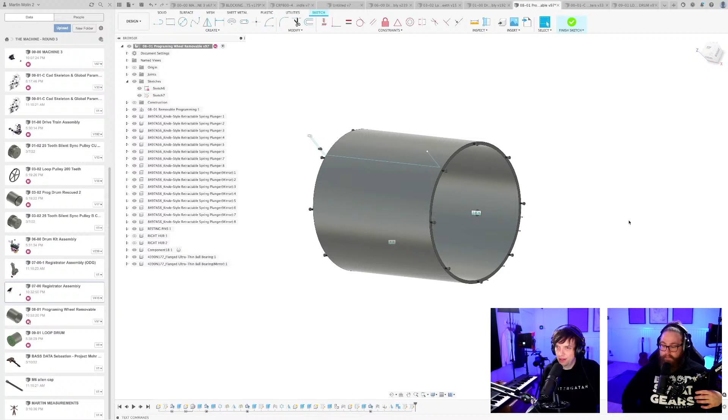I need some thinking juice. That's what I need. Yeah. Can you get me some juice? Yeah. It's getting warm in here.

I'm in love with this idea of switching the registrators or the programming wheel. I don't like to slide... Oh, careful. Yeah. I don't like to slide the whole wheel because it's just so huge. Where's the registrators? Do I have it over here? Yes, here it is. So the cool thing with this, we can always dream, can't we? This. Let's also take this. Let's make a rectangular pattern. I think this would be kind of fantastic.

So we're talking about making the programming wheel able to hold twice as much information and able to play twice as long patterns, which I think would be revolutionary. I have to make it a little thinner, but not a lot. Woohoo! Hey, what happened to the bolt? Let's lubricate our minds. So it would look like this, and you just shift it over 1 centimeter, and you have a new part of the song. Is it feature creep? Is it wonderful? Oh yes, it's both. All at once.

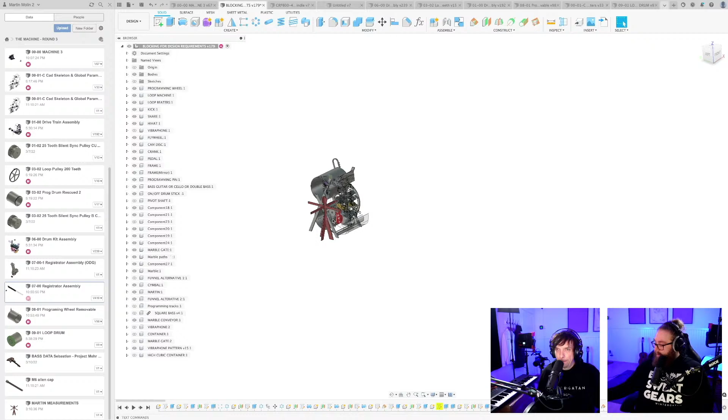You could do this so easily. Like I could do it from my standing position. Let me see, where is my block? I have too many designs. This I could do with my left arm with a cam lever right here. So let me show you what I mean. Let me try to make a sketch plane. Make a new component. So we can have a cam lever here that pushes. So if I put the pivot point here, object visibility. Let me see those juicy sketches. A round circle looks like this, but we're not gonna make it round. We're gonna make it a cam lever. I think it's called a cam lever. Let's call it that for now.

Yes. Friday evening. Thank you. Thank you, Hannes Paradis.

Well, maybe not like that. So it's an ugly one, but you will get the gist of it. So I should add a little lever to it also to make it a lever, right? Oh, yeah. You could very accurately shift this whole component. You can add this whole component on a rail that is built for this to shift. So now if I push this lever around this pivot point like this, you can see how this part goes in. And it will push it over. And with the correct geometry, you can make it.

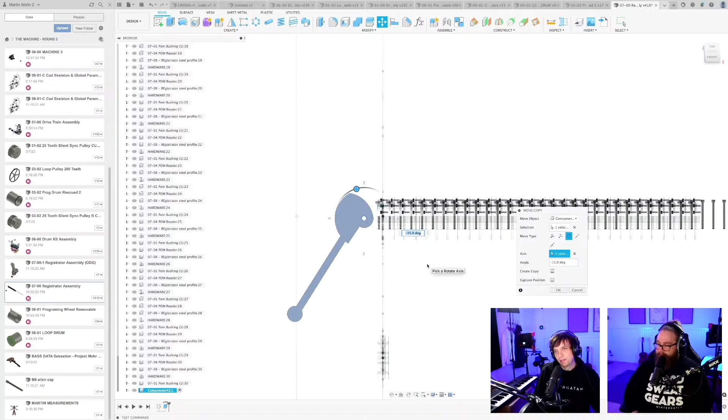So here, this side is the verse, and this is the chorus. And like Per said yesterday, don't bore us, take us to the chorus. Ooh. So this would be like, and here will be. Wow. Cool, huh? Yeah. I think you're onto something here. This would be amazing. I'm thinking about the problem with touching the pin from the sides, like Lucas said.

If you just go slow, yeah, it is a little tricky. Or maybe it lifts up at the same time. Uh-huh. We lift the whole thing in the same motion. Can we look at the video with Lucas again? He just lifted them. He first lifted the thing, then he shifted them.

So if I make a sideways sketch on this one, we lift it at the same. Can we do that? Yeah, we can. I think we can. Don't you think we can? Of course we can.

So show any new viewers inside the organ here, if you come closer, Hannes, is that there is actually 7 songs programmed on this same barrel. And Lucas showed, you can show how we're... So first you need to have this up, because if you would move the barrel side to side, it would break some pins. But after that you can lift this, and this like knife gets a catch in a groove. Okay. And after that, if you're in the groove, you know you have the right melody, and you can read what melody you have and just count the grooves in the shaft.

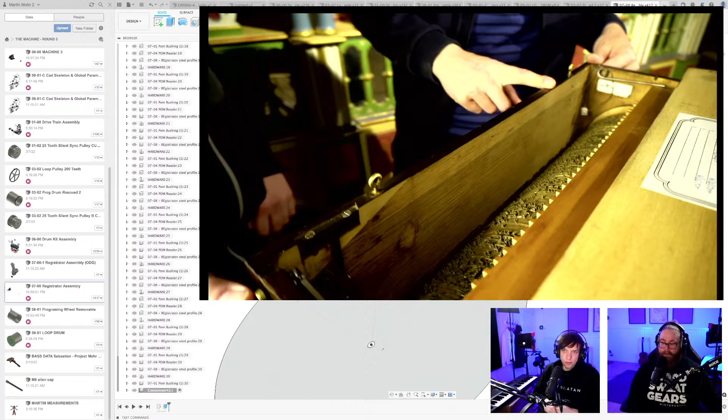We have to lift all the registrators. And I can't wrap my head around that. The work of placing these bridges and these nails. There's still one person left who does this kind of work. Wait, if we lift them, we will have another edge case where they land on top of the programming pins when we're dropping them back down again. Not so smart.

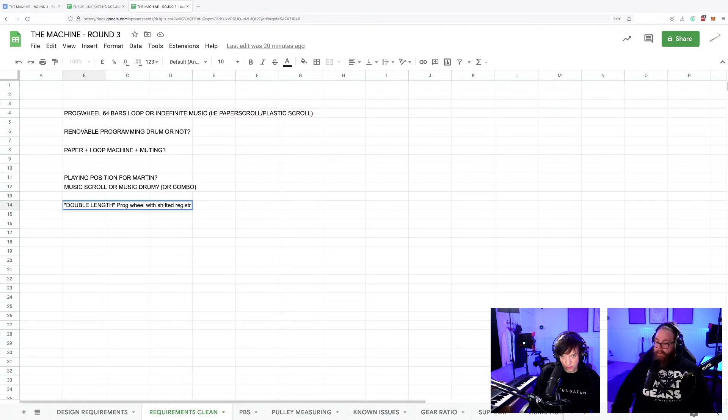Anyway, for now, if we can make it double length with the programming wheel, this makes the decision even more fun. Removable programming drum or not? Yes, it's going to be removable. Boom. Yes. Paper loop machine plus muting. Playing position for Martin. The loop machine stays. Oh, we answered all these questions. I thought they were unanswered. Answer: prog wheel. Removable.

There's one reader, something Ethan Dagg said, don't make them lift, make them rotate backward while shifting. Ooh, and then if you mute... Oh, that's smart. Hold that thought. Playing position for Martin, left side. Music scroll or music drum, that's already answered up here. Double length, yes. How many double lengths do you want? Yes. Yes, please. Okay, so here comes a suggestion from Ethan Dagg. Don't just rotate. Yeah, so basically this lever needs to do a chain.

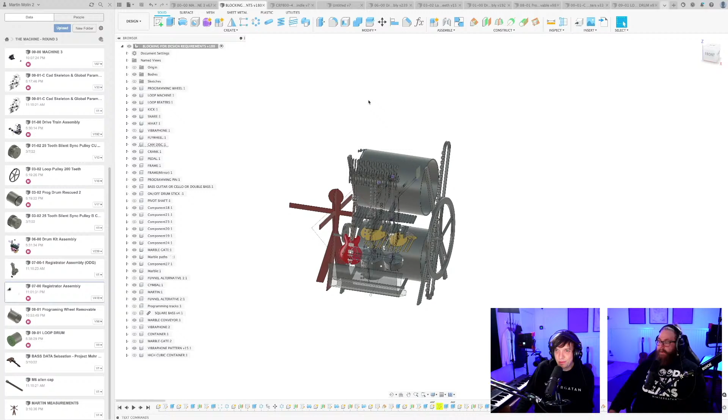Yeah. Yeah, these days when working mostly with the high-level design decisions, it's so abstract, and I'm so impressed with everyone being here with us right now that you are following this madness, because it is easier, I think, when I'm CADing one part and I'm finishing that part. Right now, we're just very much in the beginning trying to get a feel of what we want the machine to do. So it's kind of abstract and kind of all over the place, so that's why.

Experimental. Yes, also. We're in an open mindset. Yes. Now is the time for dreaming as well. Trying to find the sweet spot of dream and reality. You know? So brilliant, this guy, right? Andrew Cooper, one lever to rule them all. That's exactly what it is. Cheers. Thinking juice.

So yeah, honestly, I don't know if I can do any more abstract concepts. Let me look at this machine from the front. The sideways shifting has me all in a tizzy. It's making me giddy. Yoo-hoo!

Friday night. My dream Friday night. Do you know what that is? CADing among friends from all over the world with Hannes 3000 and being sent a curveball of a design idea that can change the future of humanity. That's my favorite Friday. Friday night hubris.

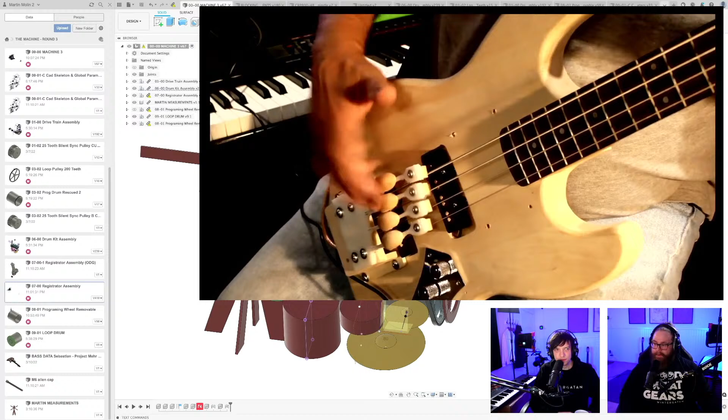Barely touching these hammer jammers. What did they say? 11? Something like that. So shout out to Big Walnut Music YouTube channel. Pretty awesome. Pretty freaking cool, right? Yeah.

So shift back, mute all. If we mute all, it really doesn't matter what the registrators do. Hang on. I said that there was an issue if it comes down on top. But as long as it's muted, is it really an issue? So if it comes down on top of a pin, it will take some time for it to fall down. Yeah, it's a good idea to swing everything back and then go forward.

Yeah, the command string, I'm trying to sound like a coder. I always wish I could code. I've never coded a single line of code in my life. Pull lever, mute all tracks, swing all registrators backwards, shift all registrators 10 centimeters sideways, rotate the registrators forward again, unmute all tracks. Then the other way of the lever, you want the same thing to happen in reverse. Thank you.

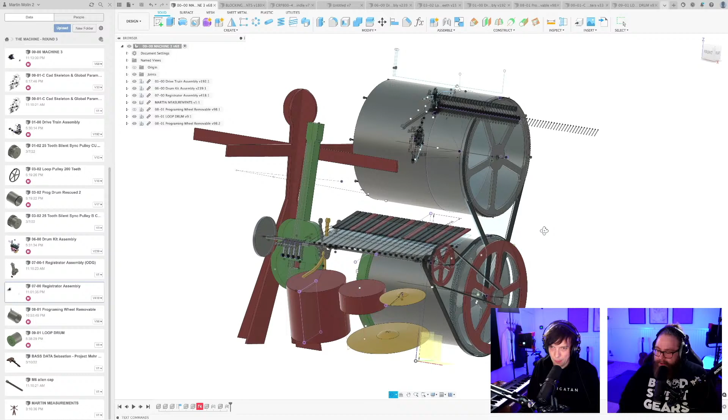Welcome everybody to the Hannes Hour. Yes. I will take questions now. Just bring them. I will take over this stream now. Enough with the CADing. Let's do some actual work. Talking. Yeah. I think we're done with the CADing. Make the design requirements less specific. And we also have a lot of suggestions on Dropbox to go through if we need to do that. Yeah, so let's do that. So we're pivoting. Now it's design review. Design review. Let's go.

Hoodie Kid 100: Hannes, my girlfriend wants to know if you're single. Whoa. Sadly, no. I'm not. That's not sadly. I am not single. Oh, burn. Oh, no. There's a lot of questions to me here. Oh, no.

So let's see. Let's go through. We already have like 8 new programming wheel suggestions. Oh, cool. So let's start with those, right? Yeah, definitely. I will prepare for that. Definitely, let's go with that.

Oh, wow. So now this is like Twitch streaming, right? This is not YouTube streaming anymore. This is like Twitch streaming when you really just hang out, I guess. I know that Twitch has their own culture, in a way cooler than YouTube culture sometimes. But we're here. That makes the decision easy, right?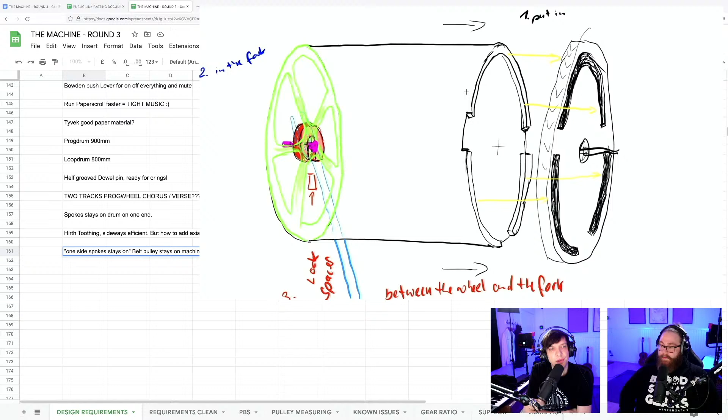Great, what about the shaft, the axle? The axle is broken here. I also like the idea of sliding the axle out to the side. Okay, let's see the next one. That was from Paddy the Fly, so thank you.

No through axle. Actual movement of side plate. Ah, there's a plunger thing. Indexing pins may be used. And this is very similar to most of the things we've been looking at. And I love the cut-through thing, it's called something fancy - section analysis, everybody.

Slide in and turn to lock. Light bulb, GU10 light bulb style. Ooh, cool, I understand that - you screw some light bulbs in. I've done that through your days.

I just don't want the whole programming wheel to be so bright. Sometimes during the tour it's good if we can keep the stage dark. And the size of this programming wheel with the light bulb fitting would just ruin the cool stage show thing.

I realize this adds a part or two to your build, but what if you had a hub that you could pin into the programming wheel that had a key and a keyway that then slid into a slot on the hub, which you would then pin into place? I would be happy to elaborate if you need. Cheers, Chad.

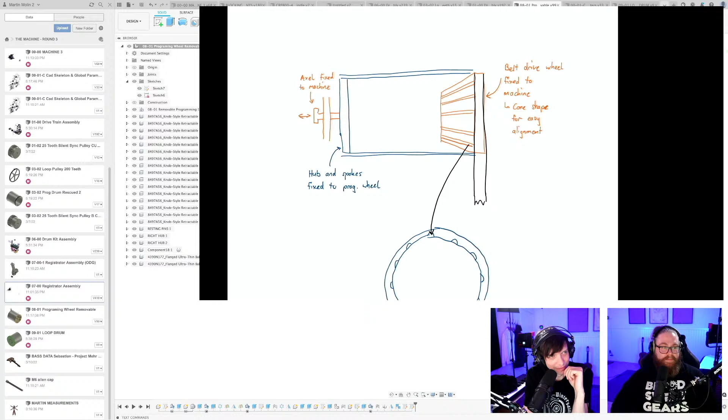Axle fixed to the machine. Belt drive wheel fixed to machine. Cone shape for easy alignment. Hub and spokes fixed to programming wheel. This is great, this is the whole thing: keep hub and spokes on one side fixed to the programming wheel, and keep it open on the other side where it's meeting the gear.

This is what I'm learning now. One side closed, one side open makes a lot of sense. We have 3 new items just while we talk here. Nice, oh there we go. Beautiful colors.

With the pins diagonally, the fixing would be more efficient and would naturally lock the barrel. Wow, that's tricky to machine though, to drill that angle. Tricky but not impossible.

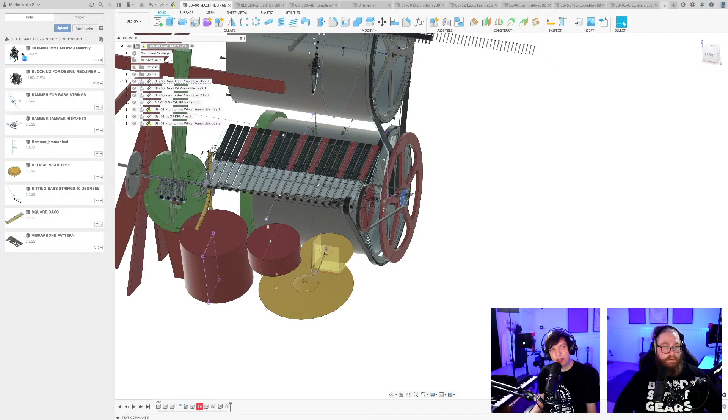And it didn't track well because I think it was too thin or something. So on this machine, we had a crowned pulley in the tensioner here. Let me see if I can isolate it. It's not crowned here on this CAD. But we had huge tracking issues with this belt tensioner because the belt climbed up on these edges all the time.

And so I know the tracking issues with a flat belt. I've also heard that a crown pulley is self-centering, but I don't know what we did wrong. Maybe the belt has to be in good tension all the time. Perhaps.

So if we go to the sketch pad, I can just show what I mean. So here's the pulley. If we look at it from the side profile, this is what's meant with a crown pulley, that you have a little hill here. And when the belt sits on top here, it automatically is pulled into the middle.

So if you see old factory images where there's long leather straps in the ceilings, there's never flanges on the pulleys. They're always crowned, like steampunk pulleys. Very seldom any flanges because they're crowned, so the belt is just sucked into the middle. I don't know why we failed on the Marble Machine X because we had a crown pulley and it still didn't track, so maybe I should watch the Steve Mould video on it. So thanks for the tip.

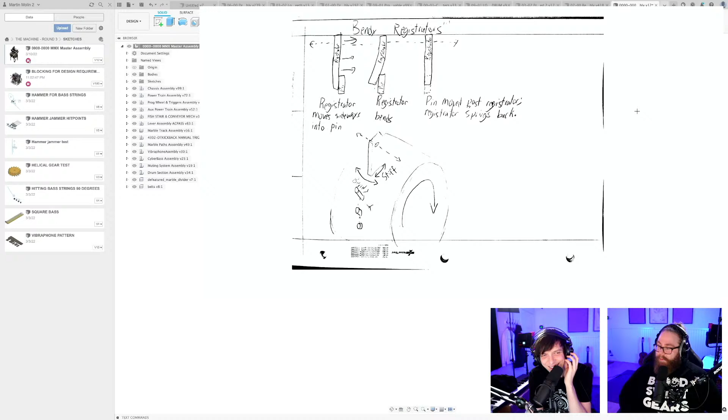The plot thickens, the plot thickens. Oh, is it for the shift? Wait, can we zoom in? Yeah, I see the word shift enhance. No, stiff, it's stiff, stiff. Oh shit, I missed it.

Registrator moves sideways, oh this is for the moving. This is a new suggestion. Registrator bends, pin moved past registrator. Registrator springs back.

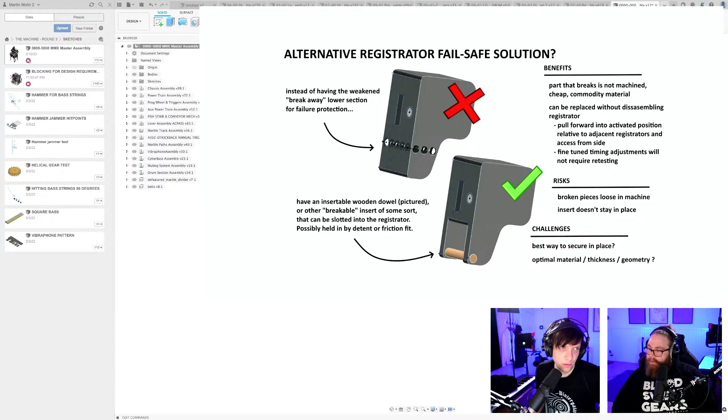You know what, go back to the previous one. I'm going to note it. Shear pin slotted into registrator POM for easy exchange, for example a thin wooden dowel. Thank you for the suggestion.

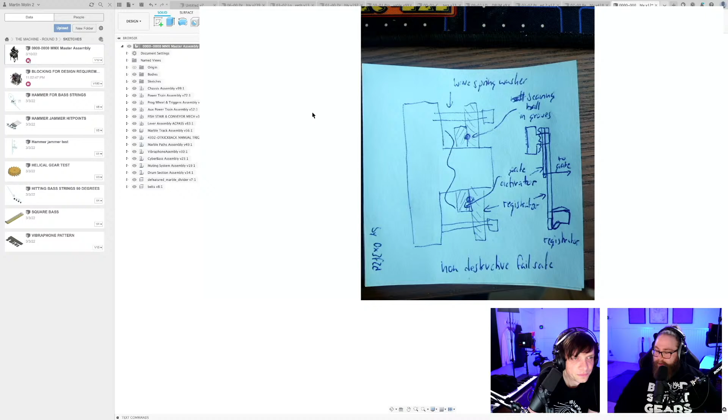Non-destructive failsafe. Wave spring washer. The gate. By Oxfeld. Bearing ball in grooves. It looks a little complicated. It looks like many parts. Registrator arms. Bearing ball. Spring wave washer. Washer nuts. Registrator. From side. Oh, is this... So it can pivot. Rotate under heavy load. Okay, so cool. This is also for it to deflect when we switch from verse to chorus if it gets caught in the middle. Cool.

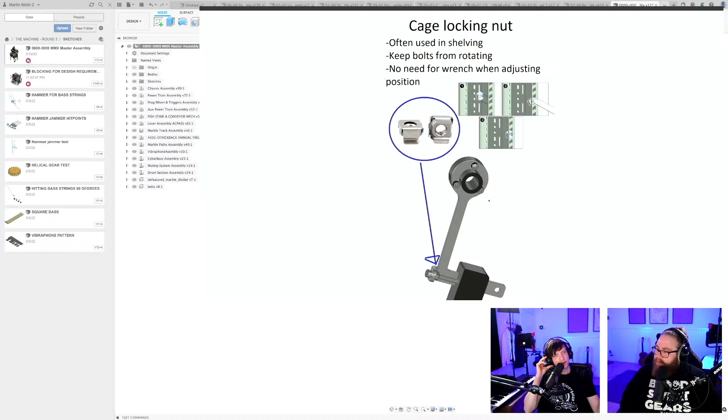Simpler registrator. So you will turn these rings, like you do on a mic to get a mic on a mic stand. Yeah. It's a pretty cool idea. It's an issue sideways, but it's a really cool idea. Cage locking nut. Oh, so that's the rack nut. Yes, I need thinner metal for that to work. But it's a cool idea. This one I don't really understand. Also, this is to make things not catch. Yeah, that's good.

Oh, there was a GIF with this one, wasn't it? Yeah, I think so, right? Oh yeah, it's playing very slowly. No, it's just still images. I don't know why it did this, but it opened it as a lot of still images. I will just scroll down here. You see the animation?

So what was this called? Tighten it. Don't need nuts, washer, or E-clips. Diff screw. Differential screw. Whoa. So on the front is like M4, on the back is M6, and the M6 travels further. Oh, that's pretty cool. Front adjustment. Okay, that's the same idea with the twist. Several people had that idea. Yeah, so that bend, I don't think 247TailorSteel will make that bend if I order that from them. I don't think their bending machine can make a radius that tight. But cool design, very efficient.

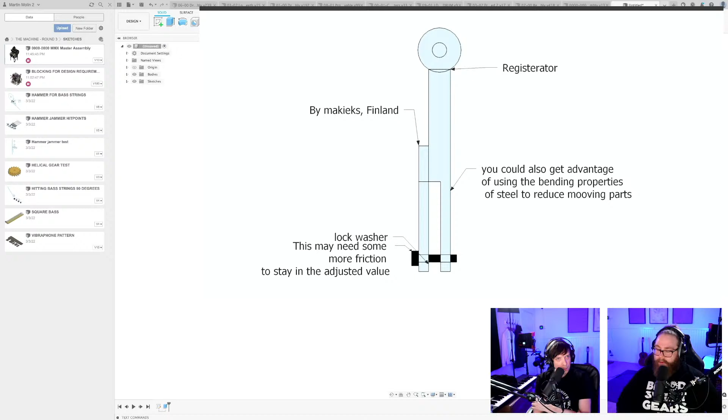We can go full screen, yeah. Registerator by makieks from Finland. You could also get advantage of using the bending properties of steel to reduce moving parts. Lock washer. This may need some more friction to stay in the adjusted value. We have one more down here, from the same person. Pivot point, lock washer. I don't follow it exactly. But greetings to our beloved neighbors in the east. Kiitos. This is someone pointing out that if you have a curve, the screw will become angled, and we don't have the curve anymore. So this red line problem has been averted.

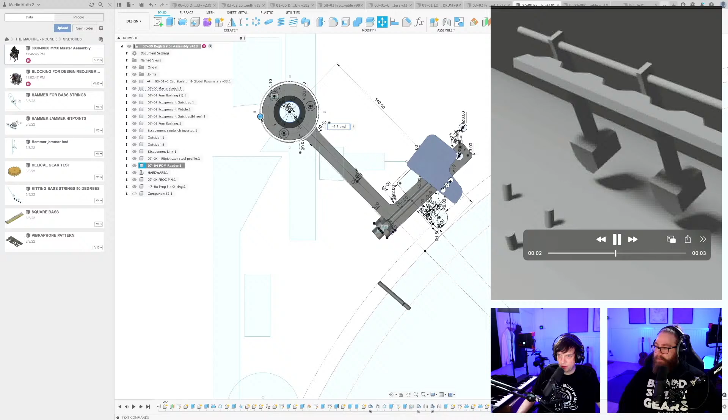I'm gonna delete this thing. We did check. Was it 10 degrees? Let's just find out. So I'm gonna rotate this thing backwards on this axis until it passes this programming wheel line. 9.2 degrees. And I will keep hitting space bar here so you can watch this. So let's just say okay.

Blender 100% from chat. Okay, thank you, chat.

So I'm gonna show you why this is not possible. We need to move the head 15 millimeter, but of course up there we wouldn't need to move. Okay, so let me actually calculate this a little bit more seriously. The head needs to be moved. But how much does this front edge need to be moved?

So I'm going to take this part and the front edge. I'm going to copy them. I'm gonna paste them and I'm gonna rotate them around this pivot until it clears down here. So what I'm looking at is this little friend here clearing that line.

You got a Fusion question here, Martin, from Upfell Musking. How do you display the measurements in the view like you did? I'm so happy that you asked this question. This is the most useful, simplest trick ever. So I'm honored to be able to answer it. I'm gonna go over to some simpler design to demonstrate for you. What was the name? Upfell Musking.

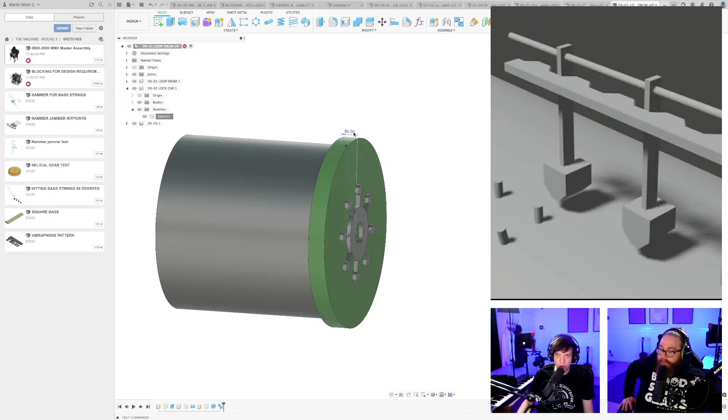Oh my God, I'm so bad at making tutorials. Where is the dimension? Oh, I didn't click it. Okay. Now I clicked it properly. And now you can see all the dimensions. And the beautiful thing is that now you can also change them without clicking into the sketch mode. I can click here and I can set this to 100. And you can see the wheel is changing within this view.

So it's very easy. Right click the sketch and show dimension. Now I can hide dimension, it disappears. That's how. Boom.

So I'm calculating the... Yes. Chat helped me get a loop. Thank you. Joachim Monsen. Oh, you fixed the loop? Yeah, Joachim fixed it for me. How? He told me in the QuickTime short command. Fantastic. I work with this full time making videos and stuff, and I have no clue. I'm so bad at this. Why is that? Because you're so goddamn good at everything else. Oh, well, thank you, sir. And there has to be some kind of flaws. Some kind of justice in the world.

So I've been measuring how much we have to deflect to really clear the pins. And this blue line is the angle. So down here, we have to deflect 13 millimeters. But up here, it will be really heavy though. So I'm suggesting this point, and this is 6.70 millimeters. So now I can draw from the top the accurate curve.

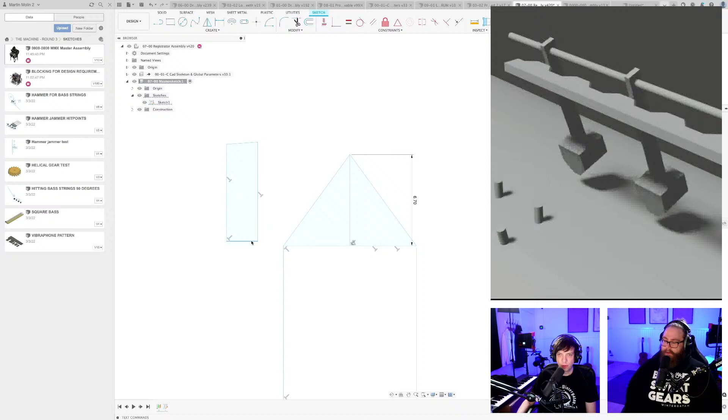Less than 45-degree angle. So this would need to move. I'm just gonna do this. And KK Altair, all I know about Fusion 360, I know from Martin. Oh, that's fun. Ba-ba-ba-boom! That's fun. So when this is slid sideways, this has to go on this steep thing, and it will be too much friction. It has to travel like this. Or to be accurate, it has to travel from here to here. And doing that with 50 channels at the same time is not feasible. So awesome demonstration, but in reality, it will be too much friction.

So let's see. We have a couple more here that we saw. But we could have a thing just coming down. Wait. Let me just CAD this. You're not done yet, are you? No. Look. We just make a big pin here from the side that goes across all channels, a long rail, and we just push it in like this while switching. Push and switch. Push and switch.

Just like at the gym, Hannes. Push and switch. Thank you for explaining that to me.

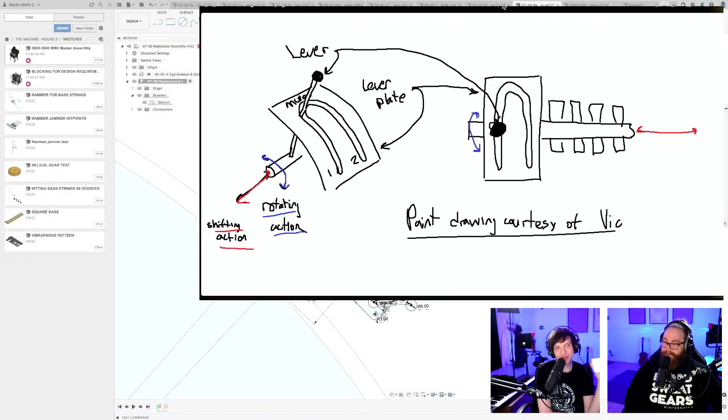Okay. On the other hand, you would need to use your arm to push all the channels over only from holding that thing. Yeah. I think that would be perhaps a little bit too much force. Super cool idea though. Let's see what's happening here. Yeah, let's see the bigger.